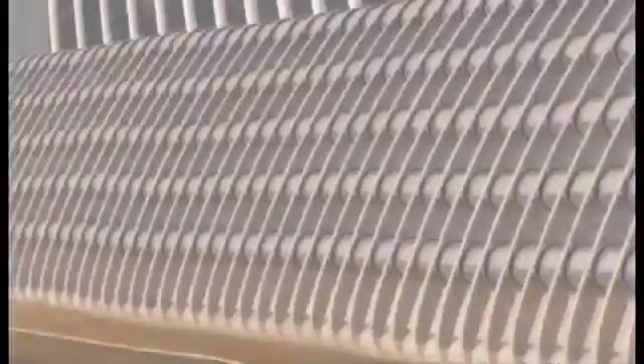This is the Millau Viaduct, the tallest bridge in the world. Its highest tower stretches a staggering 343 meters. So high, the bridge glides above the clouds. But this is a megastructure they said couldn't be built. When I've shown first the drawing of this bridge, they really thought I was crazy.

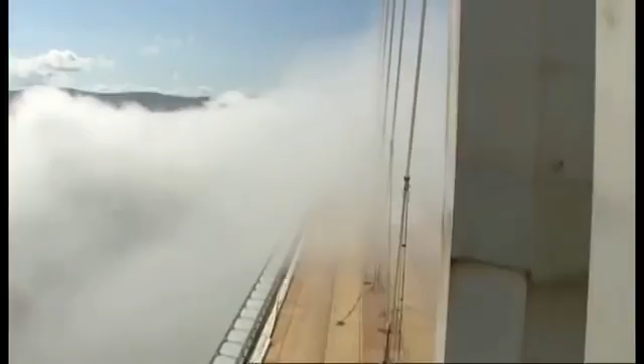The team attempting to build this amazing freeway in the sky had to survive landslides, fight winds gusting at 130 kilometers an hour, and weather massive storms as the bridge simply hung in the balance. It's a bridge that pushes the boundaries of engineering to the limits, and then beyond.

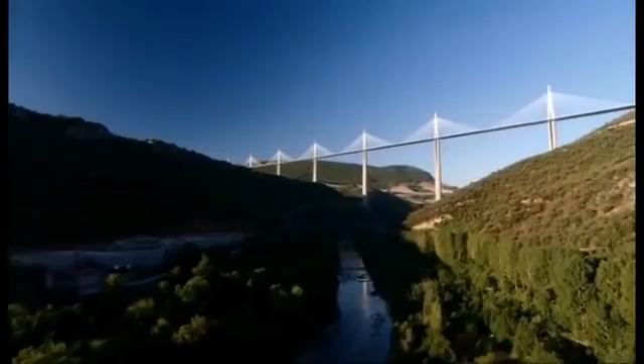Imagine building a series of Eiffel Towers, then slinging a 4-lane highway between them, all the way across one of the deepest valleys in France. Impossible though it sounds, that pretty much describes the building of the Millau Viaduct.

From the start, the construction team faced 3 daunting challenges. 1. Build the tallest bridge piers in the world. 2. Put a 36,000-ton freeway on top of them. And 3. Erect 7 steel pylons, each weighing 700 tons.

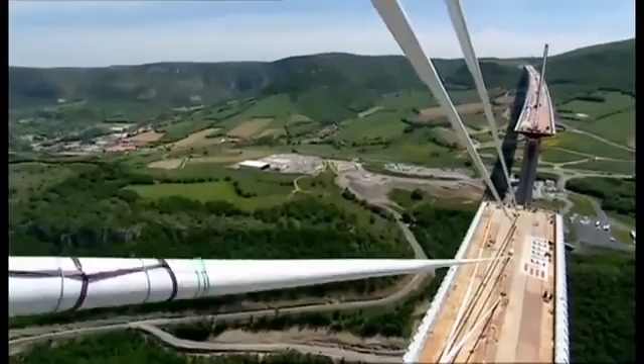And what's more, they had to do this hundreds of meters above solid ground. So high that if you were on top of the Eiffel Tower, you'd still be looking up at this awesome bridge.

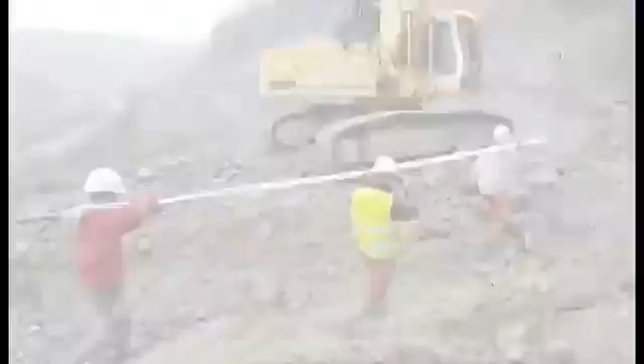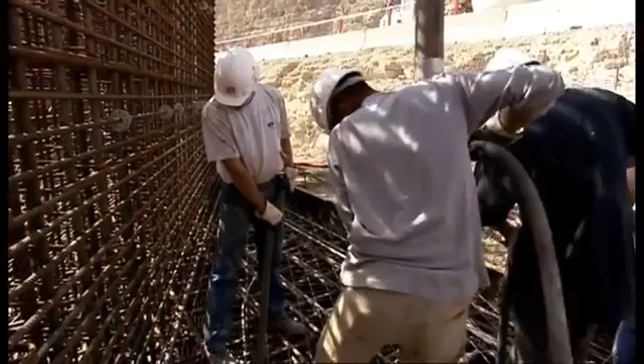October 2001, the team break ground. They're required to build a bridge that'll last for 120 years. And to win the contract, the teams promised to build it in record time, less than 4 years. By comparison, the world's longest suspension bridge, the Akashi Kaikyo in Japan, took a full 10 years to build. To up the ante, any delay will cost them $30,000 a day in penalties.

There are 7 piers that are numbered from the northern end of the valley. Number 1 will pose problems because of the steep slope. Number 2 will be the biggest challenge since it's the tallest. Crossing the river, number 3 is not much shorter. Then 4, 5, 6, and 7 climb the gentler slope to the south.

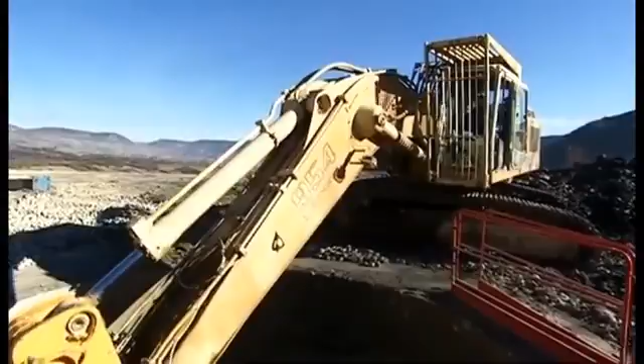To begin, the team had to bury the foundations deep in the bedrock in order to support the enormous weight the bridge will place on them. But the forces of nature were stacked against them. Geologists have warned of the risks posed by the region's fractured limestone. The rock is full of cavities that are essential to the local cheese economy.

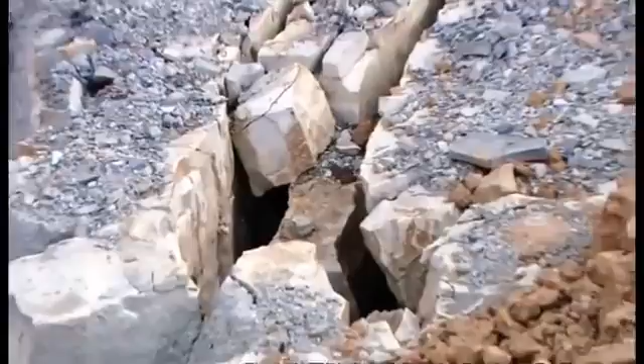These cave systems, close to Millau, are home to a unique bacteria responsible for the blue mold in the world-famous Roquefort cheese. But what's perfect for cheese could be disastrous for a megastructure. The geologist's diagnosis spelt one thing: landslides. This kind of catastrophe could jeopardize the entire project. Despite the warnings, building went ahead as planned.

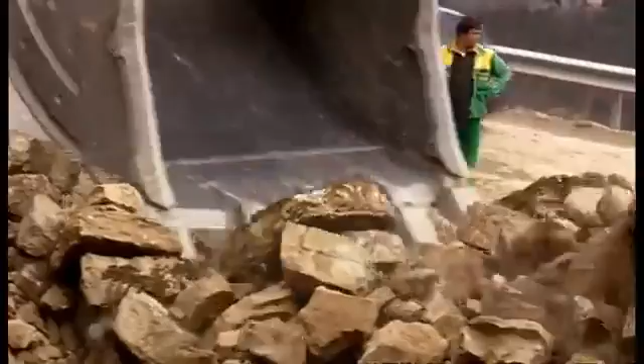Then, well into construction, as predicted, a dramatic storm causes a landslide. 4,000 cubic meters of rock collapse around Pier 1. Fortunately, the fallen rock doesn't damage the pier, but the warning is clear. They're forced to divert precious manpower and equipment to stabilize the slope and prevent a repeat collapse.

So if the area is prone to landslides, why did they build the world's tallest bridge here in the first place? The answer is simple. In the 1980s, France built a freeway linking Paris directly with Spain. This major artery headed south across the French countryside, while from the Mediterranean, the freeway headed north, until they both hit one of the deepest valleys in France and stopped dead.

Welcome to Millau, France's least favorite bottleneck. The town of Millau is in the mountainous region of the Massif Central, one of the most tranquil parts of France. But in summer, this poor medieval town suffered traffic hell. The locals couldn't take it anymore. Neither could their mayor.

It was terrible for our reputation. When you hear every day on the television and radio, avoid Millau, there's a traffic backup, a 5-hour wait in Millau.

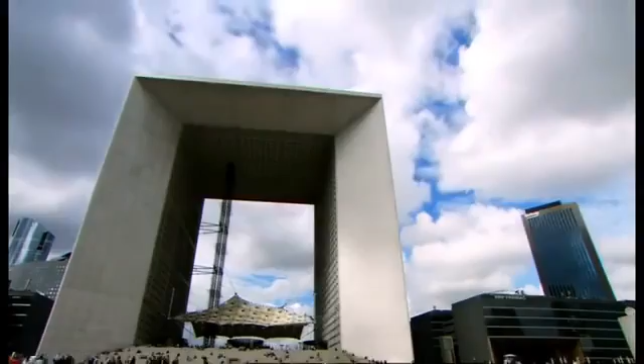It's clear exactly why the bridge was needed, but it took the French government a very long time to get round to building it. 12 years before construction began, up in Paris, the Ministry of Transport first came up with a plan. Their head bridge builder, Michel Virlogeux, is no ordinary engineer. He's a man who thinks big, very big, like the Normandy Bridge in northern France, the longest cable-stayed span in the world.

With this record-breaking structure completed, Virlogeux was on to his next, Millau. His plan, another cable-stay bridge, but pushing the technology beyond anything previously attempted, with piers 4 times higher than the Normandy Bridge.

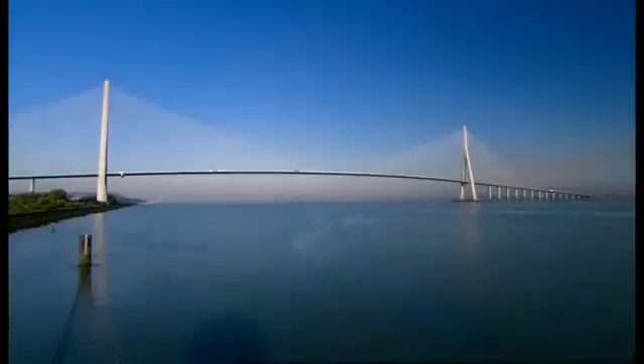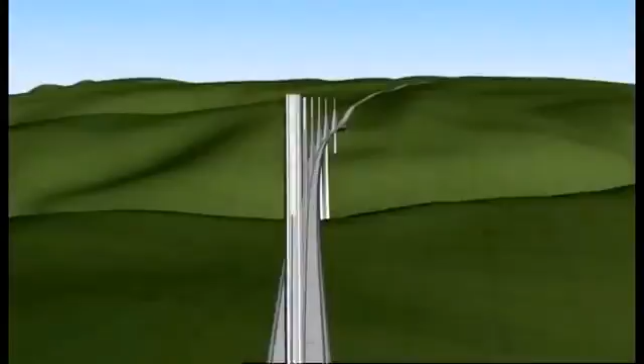The Millau Bridge would not only be the world's tallest, it would be unlike any bridge ever constructed. When I first showed the drawing of this bridge to the competent authorities, they really thought I was crazy. Virlogeux's Normandy Bridge has 2 sets of cables supporting the deck. But he wanted to up the stakes for Millau by losing 1 row of cables, so the remaining line would be forced to do twice the work.

More dramatically, the 2.5-kilometer Millau Bridge, instead of having a single main span, needed a whole series of piers to support it across the valley. No bridge builders had ever attempted a multiple-span, single-line cable-stay bridge on this scale before. The French authorities had a problem. Nervous about Virlogeux's groundbreaking scheme, they held a competition inviting other engineers and architects to compete with different designs.

The winner, Lord Norman Foster, is one of the world's superstar architects. In Hong Kong, he built the world's largest airport terminal. In Barcelona, offices literally hang from a mast on his communications tower. This is a man who regularly contemplates the impossible and delivers. You know, it's the challenges, and it's one challenge on top of another, on top of another. And with Millau, one of the biggest challenges was making it fit into the landscape, given it's just down the road from the famous Gorge du Tarn, France's equivalent of the Grand Canyon.

How do you make something which has to be so immensely strong against the forces of nature look very gentle, very delicate? How do you weave something on that scale into the most unbelievable landscape? Ironically, Foster's answer was to take Virlogeux's pioneering scheme, then push it one stage further. He turned an elegant piece of engineering into a delicate work of art by boldly cutting out 2 of the 9 original piers and seriously slimming down the remaining piers and road deck.

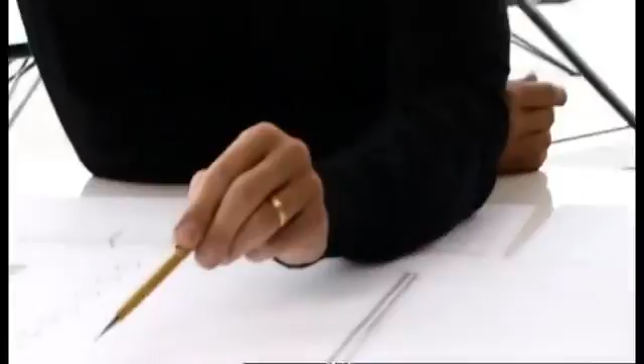Foster wanted the bridge to appear as delicate as a butterfly, but this butterfly has to support the weight of 5 Eiffel Towers in gale-force winds hundreds of meters above the River Tarn. Getting the design wrong would be a disaster. Then, with Millau still on the drawing board, Foster's record as a bridge builder suffered a major setback.

His Millennium Bridge in London is actually another record-breaking structure, the lowest profile suspension bridge in the world. But when this footbridge opened to the public in June 2000, it was a public relations disaster. Crowds walking over it set up a resonant frequency, and the bridge began to sway. As people adjusted their step to the small initial wobble, the effect was magnified.

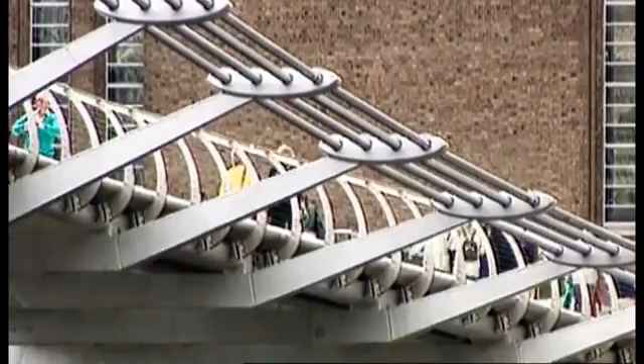Though it didn't threaten the structure, the swinging motion became so dramatic, the authorities closed the bridge for a refit that took 1.5 years and ended up costing over $8 million. It was a bad omen for the Millau Bridge, where construction was soon to begin. And at 15 times the height, a design flaw would be a catastrophe.

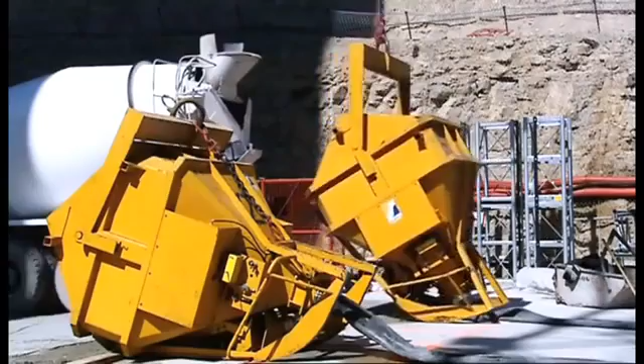December 2001, France's Millau Viaduct, the tallest bridge in the world, is under construction. Everything about this project is supersized. It'll need 200,000 tons of concrete, so much that the team have to build a concrete factory on site. But there's nothing straightforward about this concrete. The formula must be just right. It needs structural strength to support the massive loads it'll have to bear. But it can't set too quickly, as it has to be hoisted into position and poured hundreds of meters in the air. And it needs to be just the right color to suit Norman Foster's vision.

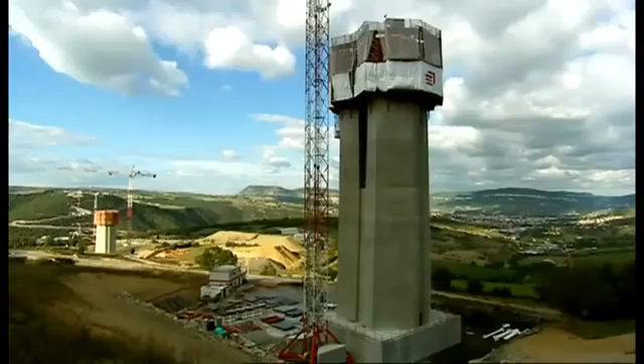In fact, the architect's vision has created a headache for the construction team. He's designed each pier as a complicated geometric shape, tapering the entire way up with vertical grooves set into them to create shadows. But what's just a line on paper for the architect was a major challenge to build.

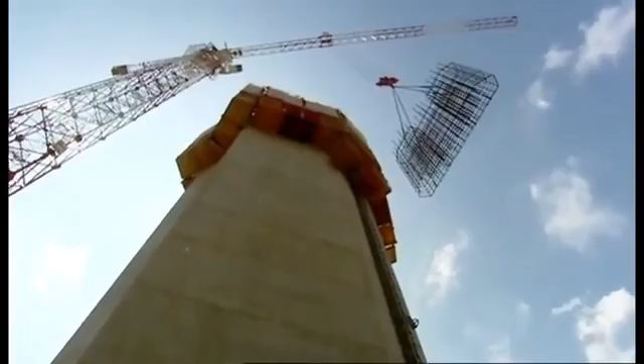The enormous piers are built step by step by pouring concrete into a temporary mold. To give the required strength, the molds are filled with a frame of steel reinforcing bars. In total, 16,000 tons of these steel bars are hoisted into place and secured. Laid end to end, they'd stretch the 4,000 kilometers from Millau all the way to Central Africa.

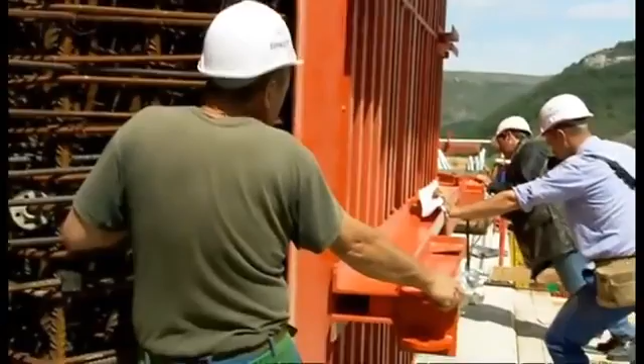The shape of each pier is seriously complicated. As a result, each time they remove the sections of red steel shuttering, they have to change the shape of the mold to fit the profile of the next 4-meter section. Manhandling these steel panels, weighing up to 15 tons apiece, is no picnic. And with the combined height of the 7 piers totaling well over 1 kilometer, they have to change the shape of the mold over 250 times.

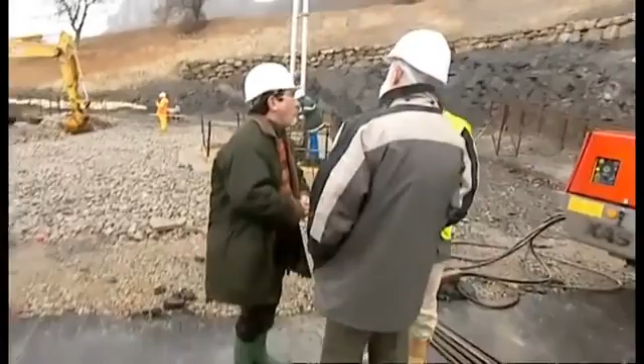Every 3 days, each team on each pier went through this whole cycle. Then they repeated the process. But it was a race against time, with a permanent threat of delay. Keeping the entire build on time and to budget was the daunting responsibility of one man, Jean-Pierre Martin.

If instead of 3 days we took 4, imagine that multiplied by the number of castings. We'd end up with a 3 or 6 month delay. With a penalty of nearly $1 million a month, this isn't something Martin wanted to contemplate. And this schedule wasn't his only headache.

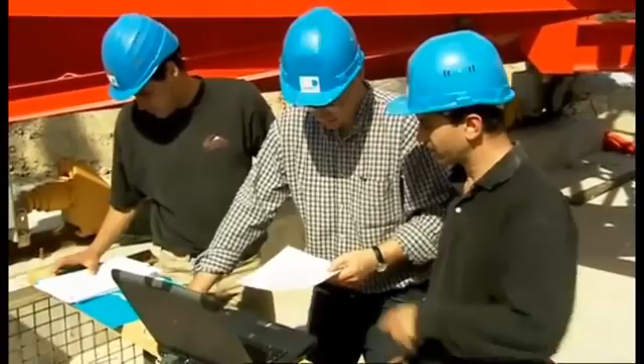You have to be pinpoint accurate when you're building the tallest bridge piers in the world. Get it wrong, and the bridge simply won't fit together. Just 10 centimeters out, about a hand's width on each 4-meter section, and the tallest pier could be 6 meters off at the top, the width of a jumbo jet fuselage.

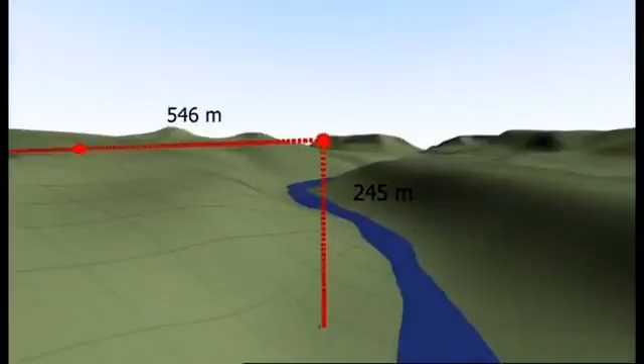Each team was aiming for a specific point in the sky. For Pier 2, this was exactly 245 meters above the ground, 546 meters from the north side, and 1,914 meters from the southern end. There was no room for error. The only chance they had to get it right was with GPS, accurate to within 4 millimeters. Using signals from multiple satellites, the team could pinpoint their position and make sure they're on target for that critical point in the sky they needed to hit.

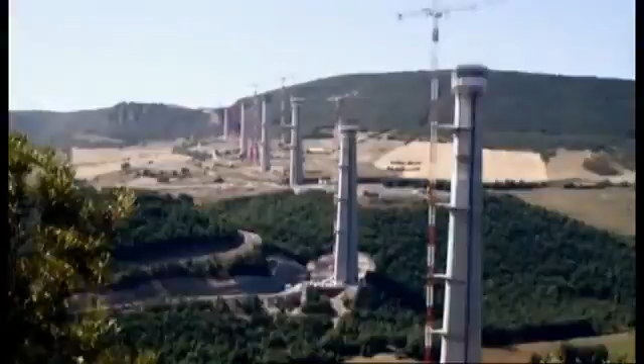Month after month, the piers climbed higher. Finally, by November 2003, they reached their full height. At 245 meters, Pier 2 becomes the highest bridge pier in the world. But is this record-breaking pillar where it's supposed to be? Amazingly, it's dead on target, to within 2 centimeters. Champagne corks pop. It's time for a major celebration.

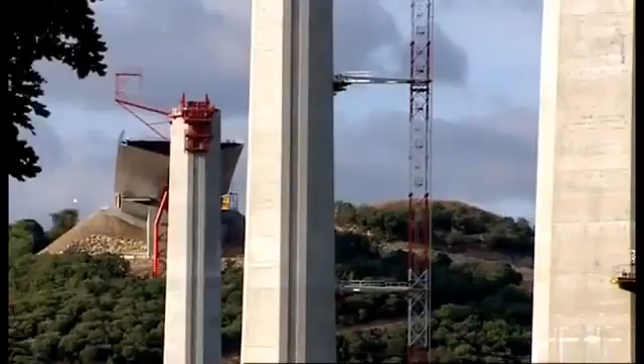Against all the odds, they were 1 month ahead of schedule, but the team couldn't afford to relax. The next stage of the project would be the most difficult part of the build. Phase 2 of building the world's tallest bridge involved putting a 2.5-kilometer roadway weighing 36,000 tons on top of the piers, a full 270 meters above the River Tarn.

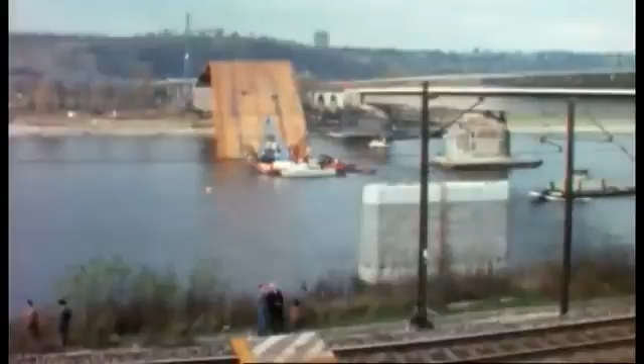Bridge builders know danger comes with the territory, but working at these heights can be lethal. More than 34 died constructing New York's Brooklyn Bridge. 35 died in 1970 on the Westgate Bridge in Melbourne, Australia. And 1 year later, 13 workers were killed when the Koblenz Bridge in Germany collapsed into the Rhine.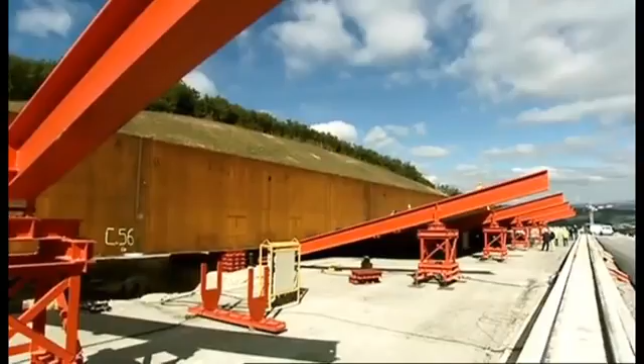With these fatalities in mind, the team decided to fabricate the entire road deck on the safety of solid ground. This meant building it in steel, which in theory would be much safer than lifting vast concrete sections hundreds of meters into position. There's only one problem with this plan. No one had ever put a road deck on piers anything like this height before, let alone over a 2.5-kilometer span.

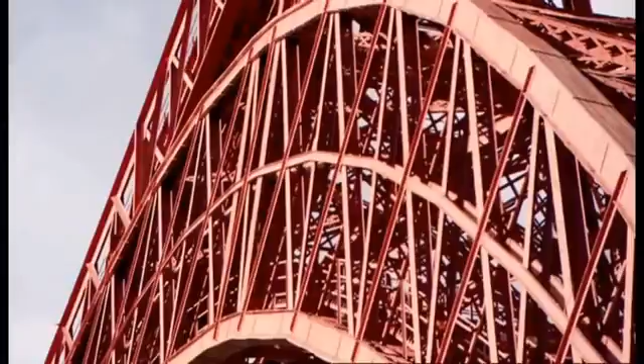In the end, only one steel manufacturer had the courage to take on this colossal challenge. Eiffel, the steel firm set up by the great French engineer. Eiffel built what was once the tallest bridge in the world, the Garabit Viaduct in southern France, before getting round to the framing for New York's Statue of Liberty and, of course, his signature tower in Paris.

But despite the company's experience, Eiffel's director, Marc Buonomo, knew he was taking a serious risk. It was a gamble for the company, because if there had been a mistake, if it hadn't worked, it would have been the whole company.

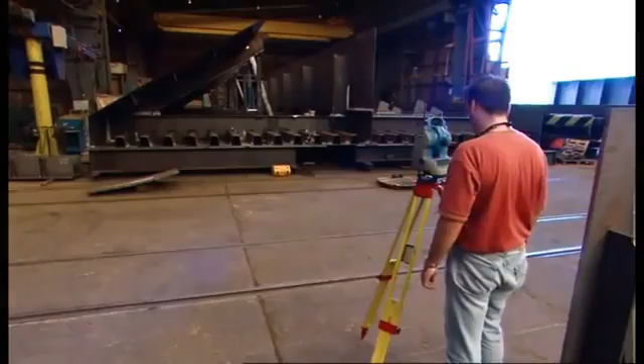They fabricated the massive sections that would make up the road deck in the company's steel factories. This immense jigsaw puzzle involved manufacturing 2,200 separate sections, weighing up to 90 tons, and some of them 22 meters long. Their accuracy is measured with a laser to within a fraction of a millimeter. The huge square tubes are the central spine that should make the deck rigid. The triangular side panels will be welded on either side to create the width for a 4-lane highway.

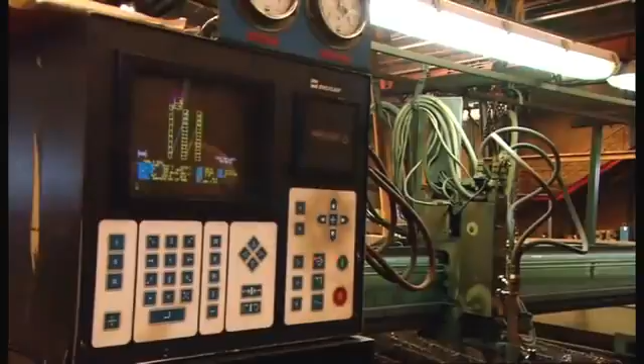To meet the punishing schedule, Buonomo automated the manufacturing with a 2-headed welding robot and a plasma cutting machine. Each cutting pattern or template is programmed into the computer. Then the machine automatically blazes its way through the steel. The torch reaches a scorching 28,000 degrees centigrade. That's 5 times the temperature of the Earth's inner core.

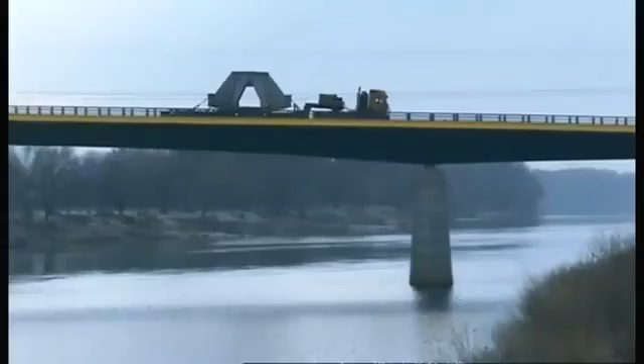But cutting and welding was the easy part. The hard part was getting these monster sections the hundreds of kilometers from the factories to Millau. The routes had to be planned with precision to avoid major damage. The police coordinated safety and clearances. Even with that level of preparation, some obstacles felt as if they're cutting it just too close for comfort. And this was no one-off event. To build the viaduct took over 2,000 of these extraordinary road convoys.

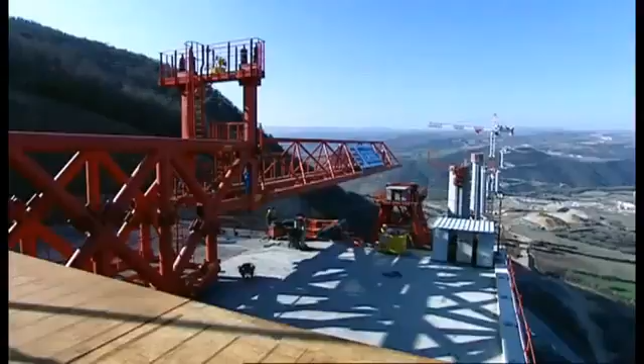The components arrived at assembly plants set up, one on either side of the valley. Here, the pieces of a massive jigsaw puzzle were welded together to form the 2 halves of the deck. But getting these 2 halves to span the valley on top of the world's tallest bridge piers would be a major challenge. They'd be the first team to put a road deck on a pier taller than an 80-story skyscraper.

And pushing bridge building beyond anything attempted before, they planned to slide the entire 2.5-kilometer road deck over in 2 colossal pieces. The bridge's chief engineer, Jean-Marie Cremer, was one of the few people who believed it could be done. All the engineers who know this method, who were in the know, didn't believe it was possible. If the team had got their calculations wrong, the entire structure could collapse into the valley.

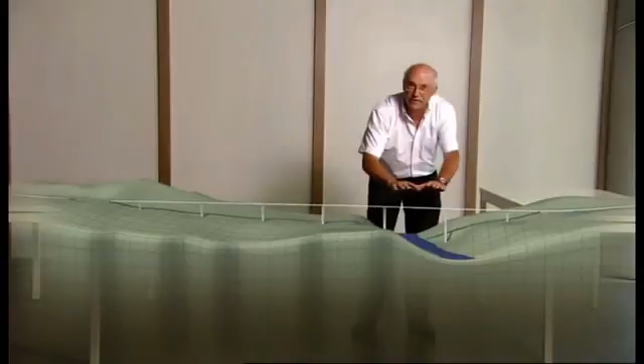We found a solution for the construction, which was to launch the bridge from the 2 sides. One part on the Larzac Plateau, one on the Rouge Plateau. And to push them from the 2 sides and to make them come and meet here above the River Tarn. Smaller bridges use a similar technique. A powerful set of hydraulic rams literally pumps the deck from one side to the other. But Millau would be the longest launch ever attempted over the highest piers in the world, and the results could spell disaster.

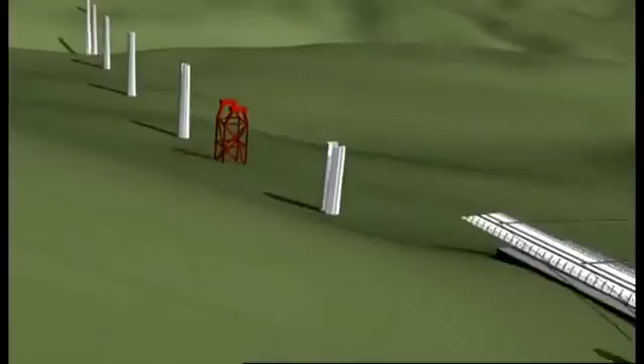The deck is so slender, it would bend and collapse if it were pushed out over the 342-meter spans between each pier. The furthest anyone's previously managed is less than half that distance. The first part of the solution was simple. Fit a pylon so its cables support the front of the deck as it goes out over the valley. Then construct temporary steel support towers that halve the spans to a more manageable 171 meters.

These steel towers were a construction feat in themselves. The largest, over 170 meters high, is the tallest ever built, and they needed to carry a massive load. 7,000 tons as the leading edge of the deck, together with the first 90-meter pylon, slide over. And simply pushing this enormous weight over the top of the vulnerable piers would bring them crashing to the ground. This was the nightmare scenario. If we'd done a conventional launch, we would have knocked the piers over like the pins in a bowling alley.

Someone needed to reinvent the way this type of bridge is built. And it's Marc Buonomo with Jean-Marie Cremer who came up with the breakthrough. The basic principle can be demonstrated with a heavy box and a wobbly table. With a normal launch, you knock over the piers. I want to advance the deck over the pier, but if I push the deck from here, I'd knock over the piers, because they're so tall.

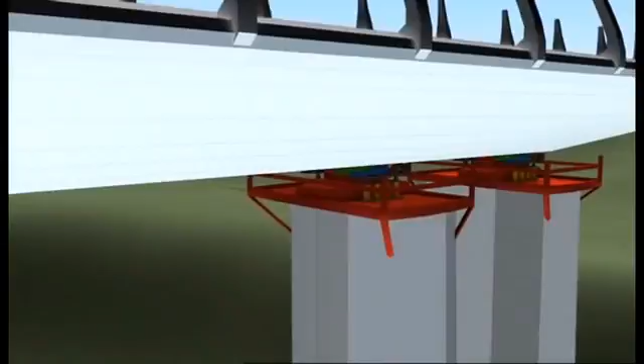The idea is to install a launching system on top of the pier, and that way, if I push the deck, it has no effect on the stability of the piers, and the piers won't fall over. The trick is to use a series of these launching systems to jack up the deck and inch it forward. Each system uses two wedge-shaped blocks under each side of the deck. The upper wedge is pulled forward by a hydraulic ram.

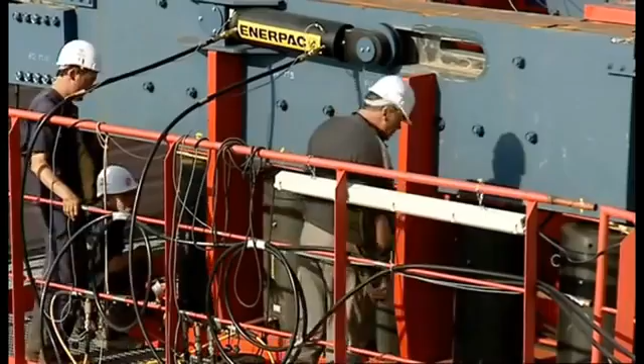It slides up the slope of the lower wedge at the same time, lifting the deck from its supports and advancing it 600 millimeters. The lower wedge then retracts, dropping the deck onto its supports. The upper wedge returns to its original position, and the whole cycle begins again. 4 of these clever devices are placed on each pier, all programmed to work at exactly the same time. The result is that together, they pick up the entire roadway and shunt it forward.

But if one fails or gets out of step, it could spell disaster. The force could push the bridge piers apart till they collapse. When you're up there and you see Millau 300 meters below you, you ask yourself, was this a good idea? The future of the entire project was now hanging on a prototype, and it had never been tested.

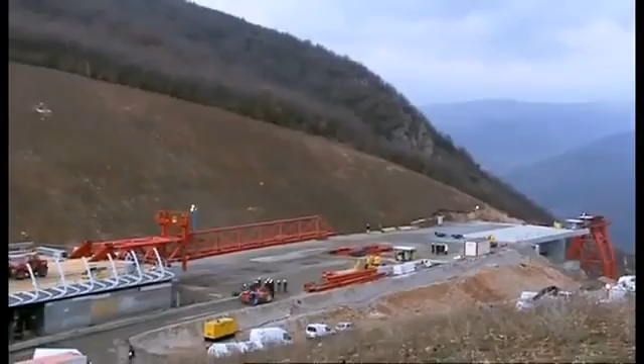It's the morning of February 26, 2003. Do or die day for the world's tallest bridge. Everything is about to be put to the test. The flexibility of the deck, the strength of the temporary piers, and critically, the pioneering hydraulic ram system. Even Buonomo, the man in charge of the launch, had his doubts. As it had never been done before, I have to tell you, I had fears that it wouldn't work.

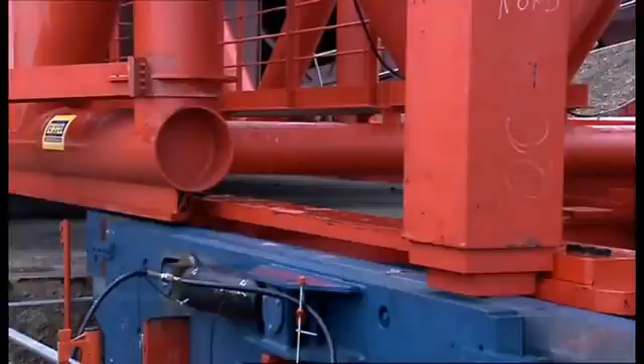The pumps kick in, the pistons start to push, and the deck begins its huge journey across the valley. The moment I heard the motors start, I put my finger on the deck, and I could feel my finger move. Every 4 minutes, the deck advanced 600 millimeters across the valley. Surveyors tracked its progress. But it was still a nail-biting time as they watched the unsupported deck crossing the void.

Eventually, the deck reached the safety of the first pier. 204 meters down, only 2,256 to go. The launching system seemed to be working as planned. The engineers were feeling optimistic. But as the deck advances into space, it'll become more vulnerable to the wind, which can reach 130 kilometers an hour.

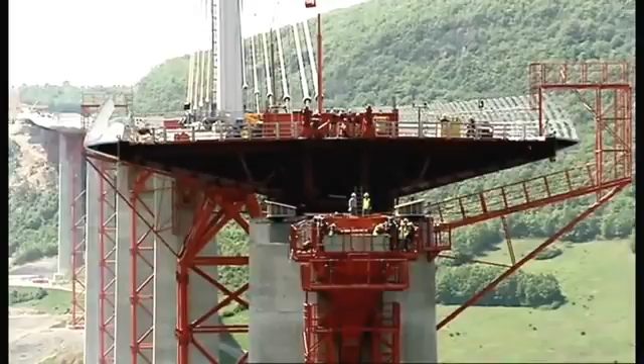Unfortunately, the road deck has the shape of an upside-down airplane wing, and the team's greatest fear is that this wing could simply take off. The engineers kept a close eye on the wind and weather conditions. When they were satisfied there was a 3-day weather window and the wind wouldn't exceed 85 kilometers an hour, they'd give the construction team the go-ahead, and the deck launch could continue.

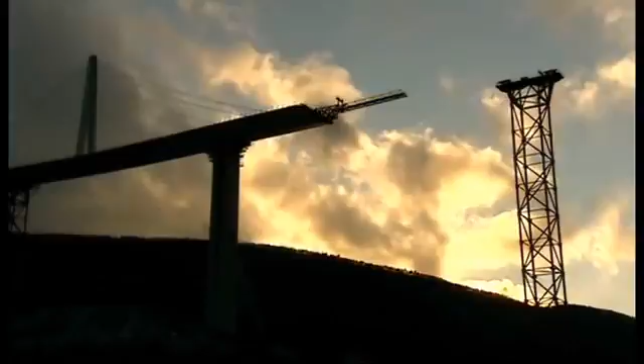The reason for this precaution is simple. Strong winds can literally tear a bridge apart. In 1940, Washington State built a suspension bridge across the Tacoma Narrows in the US Northwest. It opened with a grand ceremony on July the 1st. But the celebrations were short-lived. The bridge had a major problem: the wind.

Girders beneath the deck, designed to make the bridge rigid, actually blocked the wind, causing the roadway to ripple alarmingly. Locals soon dubbed it Galloping Gertie. On the 7th of November, with the wind less than 70 kilometers an hour, the bridge begins to twist violently. At 11 a.m., time runs out for Galloping Gertie. The wind sends the bridge crashing into the river.

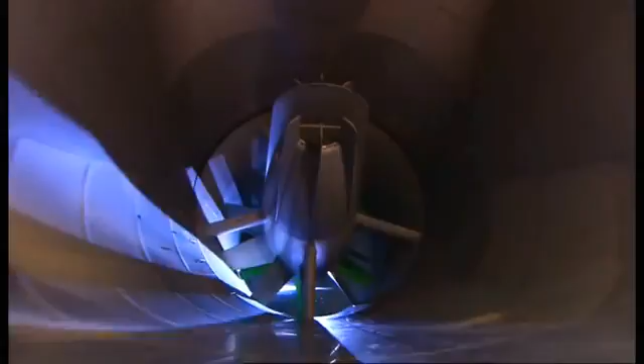Wind tunnel testing is now standard procedure as a direct result of Galloping Gertie. For the Millau Bridge, they analyzed the wind in the Tarn Valley over 18 months, then recreated those conditions in the wind tunnel. Wind engineer Olivier Flamand was shocked by the results. The average wind speed was relatively low, but because there's such strong turbulence, it created very fast peak winds. The rugged terrain creates serious turbulence at the height of the road deck. Winds peak at 130 kilometers per hour. That's hurricane force.

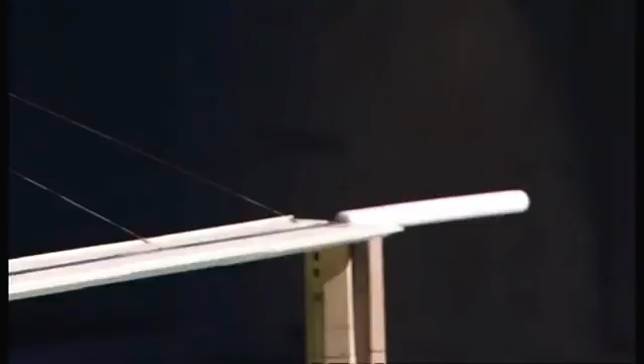They tested every aspect of the bridge to analyze the risks: piers, pylons, and critically the deck. But it's not just the aerodynamics of the finished bridge. They needed to find out how it would behave when it was most at risk, during the launching of the deck. Olivier and his team reached a chilling conclusion. The winds they've measured are strong enough to blow the unsecured deck off its supports and send it crashing hundreds of feet to the valley floor.

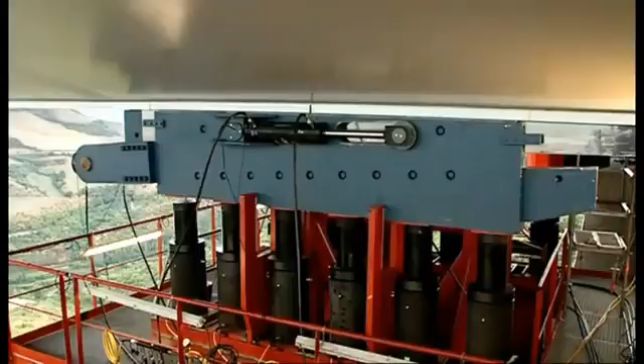And then the nightmare began. On the 22nd of August 2003, 6 months into the deck launch, one of the launch systems failed, leaving the deck hanging in the wind. To make matters worse, the weathermen were predicting storms. So far, these massive pumping machines had worked perfectly. But the fact is they were prototypes, and due to the frantic schedule, they'd never been tested.

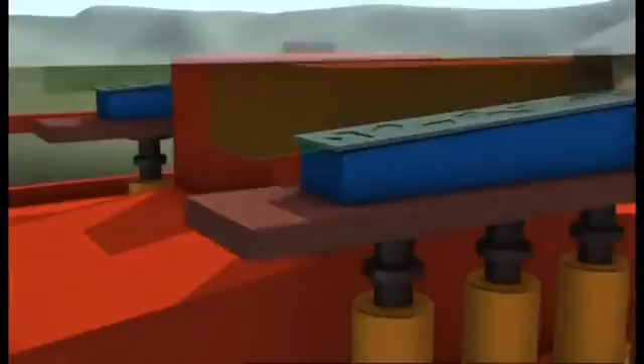The problem was that the non-stick Teflon between the sliding surfaces had ripped, and the friction generated was too much for the hydraulic rams to push against. Unfortunately, no one had planned on replacing parts of this monster machine mid-launch on the top of a massive concrete pillar. This was very bad news for the man who staked his reputation on this system. It was maximum stress, like poison in your mouth. You don't forget that.

Re-examining their calculations, they realized the cause of the problem. They'd underestimated the forces between sliding surfaces, but they wouldn't be able to repair it without the necessary spare parts. The clock was ticking, and Marc Buonomo needed a solution fast. When Apollo 13 came back with that incident, the NASA engineers requested they did the inventory of everything there was on board to know how to fix it.

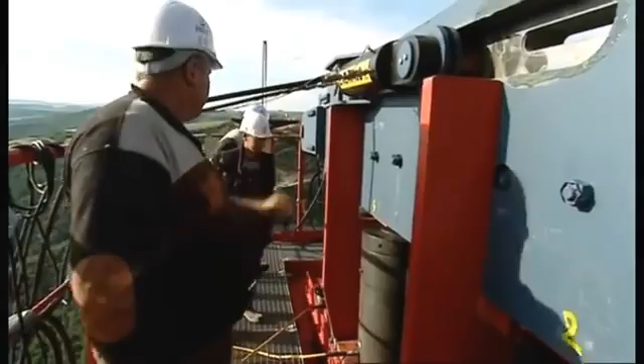The Millau team did an inventory. They realized that the other launching machines, not yet being used, could be stripped to provide the new Teflon surfaces they needed. Working all through the night, the team extended the access platform. This allowed them to take out the 5-meter-long, 2-ton steel wedges, replace the Teflon, and reassemble the launching machine. By 8 a.m. the next morning, it was ready to resume the launch.

The rest of the week, the predicted storms arrived, and another set of launching machines wore out. So when the deck finally made it to the safety of the next pier, the team breathed a major sigh of relief. You don't forget that. I won't forget that for 4 hours I was really scared. The two decks continued their journey across the valley, day after day, week after week for a full 14 months. They approached each other, millimeter by millimeter.

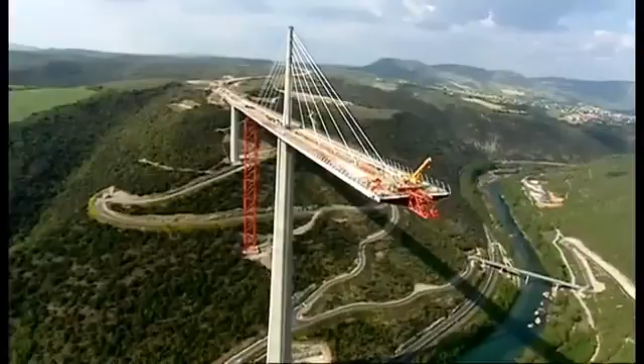By May 2004, they'd reached a critical phase. From the northern end, the shorter deck had traveled 717 meters into space to reach its final resting place. From the south, the longer deck extended over 1.5 kilometers. Only the section over the river, the one point where it was impossible to erect a temporary pier, divided them.

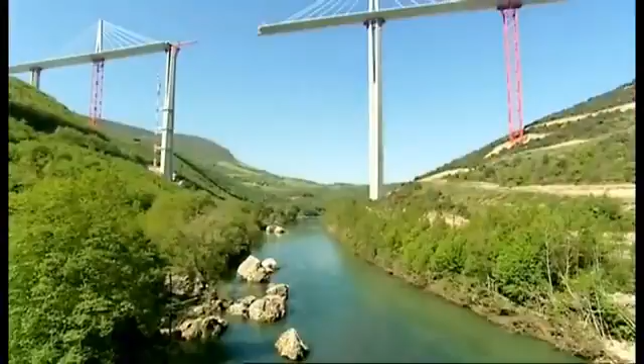But would they meet as planned? If they've got their calculations wrong, they'll have built the biggest white elephant in Europe. Even the man behind the whole project had his doubts. I was not convinced at all that the two parts of the deck could meet exactly with a perfect geometry.

The odds were against them. Calculating such a feat so precisely is a Herculean task. Firstly, the two starting points on the northern and southern slopes of the valley are at different heights. Secondly, the bridge has a subtle curve to it. As a result, each steel panel which makes up the road deck had to be cut and welded with extreme precision. It would be an engineering triumph if they got these two sloping curved decks to meet as required.

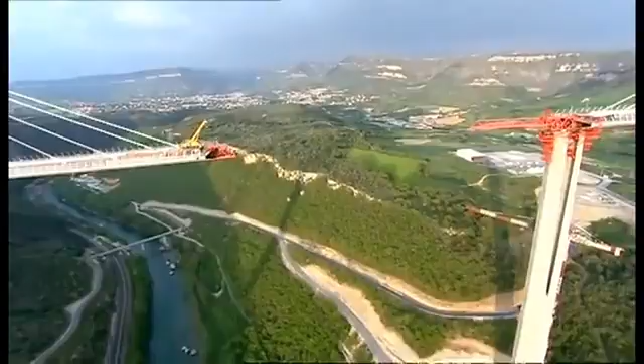The team checked the weather reports. With the wind inside safety limits, they gave the go-ahead for the final push. The rams began to drive the deck's leading edge off the safety of Pier 3 towards its destination. At this point, a total of 21 launching systems needed to move at exactly the same moment to avoid disaster. If anything were to go wrong now, the man responsible would be Marc Buonomo.

Everyone asked me, how can you be sure that it will go straight? So to be sure that they were going to the right place, I had a GPS put on the front, so I could see the gap between the theoretical and the real position. Over the next 2 days and nights, the deck advances 600 millimeters at a time towards its final resting place. The world's media are watching the critical meeting of the decks. And to add to the pressure, the French Prime Minister is due to drop in to celebrate the event.

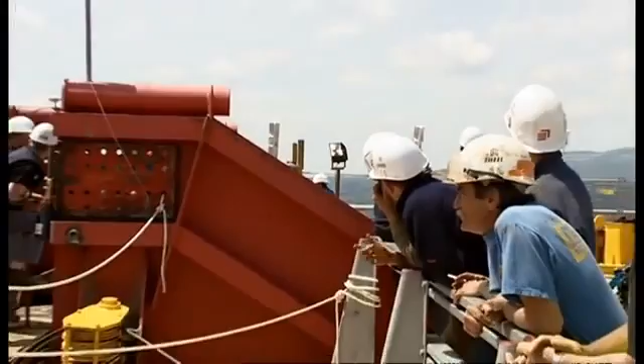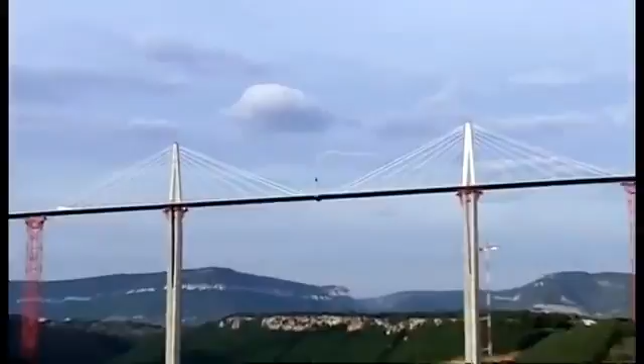The deck pushes forward, now with only centimeters separating the two sections. A magnum of champagne is hung between them to mark the moment. At last, union. The two massive steel decks have traveled high over this valley, a total of 2.5 kilometers, and when they check, they're aligned to within 1 centimeter. That's accurate to within 99.9999%. All the measuring, all the calculations have paid off. They've nailed it.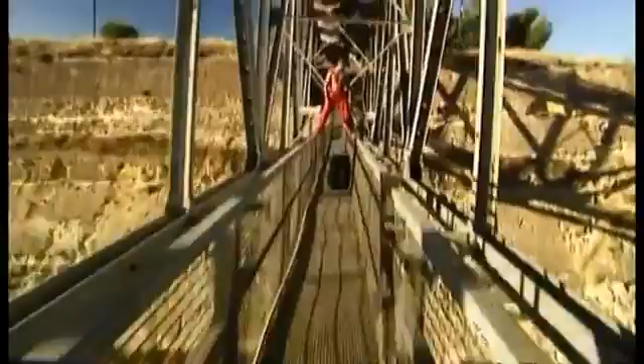The meeting of the decks was a special moment. News reports traveled round the world, and in Salzburg, Austria, they reached Felix Baumgartner, aka Felix the Conqueror. Felix has made a career base jumping from some of the tallest structures on the planet, and within 24 hours, he'd driven to Millau and was calculating the logistics for the jump, factoring in his two main aims, to avoid arrest and death.

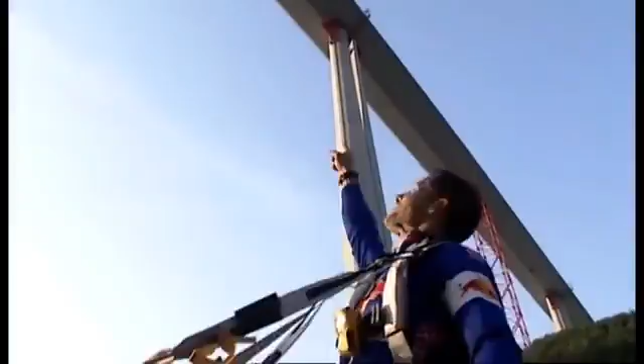Baumgartner waited for darkness before arriving on site. He found his way to the base of Pier 2, then climbed an access ladder the full 245 meters to the top. He entered the steel road deck and found a place to hide until daybreak. He had to remain concealed until the sun was high enough for his cameramen to record his world record attempt. At 7 a.m. the following morning, Felix the Conqueror emerged. He took a cool backward flip off the tallest bridge in the world and entered the record books. The tallest bridge in the world, 250 meters. I did it. And having evaded death, he made sure he's not caught by the police.

The decks have been joined, and the team have reached the final phase of the project. But there was still a race to meet the schedule, and their problems weren't over yet. Everyone could see the dramatic undulations in the flexible steel deck. Even some hardened bridge builders wondered about its structural integrity. It was a huge surprise for everyone. All the engineers said, we knew steel was flexible, but not that flexible.

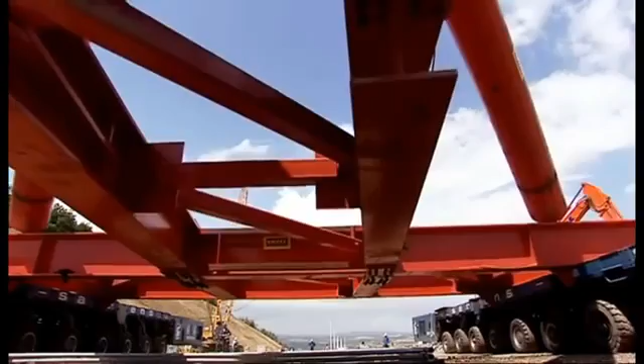The team were relying on the pylons and cables to pull the deck straight. Each massive pylon is 90 meters high and weighs 700 tons, the equivalent of 85 London buses. Placing them in position on the slender deck, high above the valley floor, would go beyond anything ever attempted. Once again, Marc Buonomo had a plan. You know, the first people to make vertical pylons were the Egyptians. Buonomo adapted a technique used in ancient Egypt to erect obelisks in the sands.

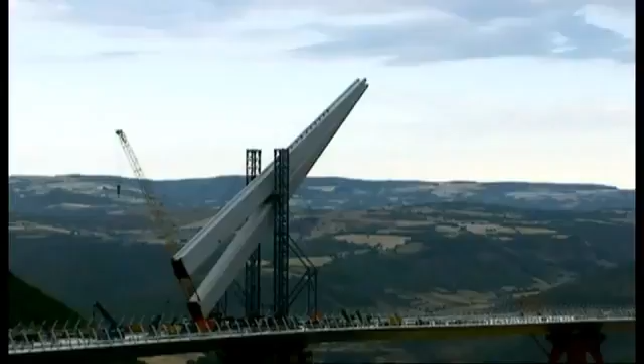On top of the road deck, the team put up two enormous steel towers, both of them secured by cables and equipped with a hydraulic system capable of raising 1,000 tons. The 700-ton pylon is then lifted by the hydraulics. As it rises, it pivots little by little until it's vertical. It's then lowered safely onto its anchorage point. Buonomo's 4,000-year-old technique worked to perfection.

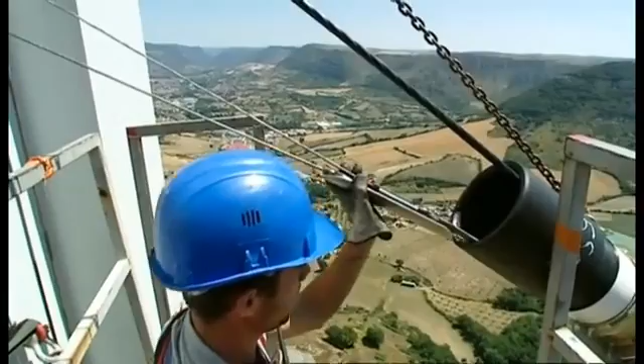With all 7 pylons in place, the team could attach the cable stays that would straighten the rippling deck and give it the strength to cope with full traffic loads. They hoped. The weight of the roadway is now over 40,000 tons, the equivalent of a cruise ship, and the 154 cable stays should prevent it from sagging or collapsing. The strongest stays are made up of 91 individual steel strands and have a breaking strength of 25,000 tons, strong enough to hold back 25 jumbo jets, all at full throttle.

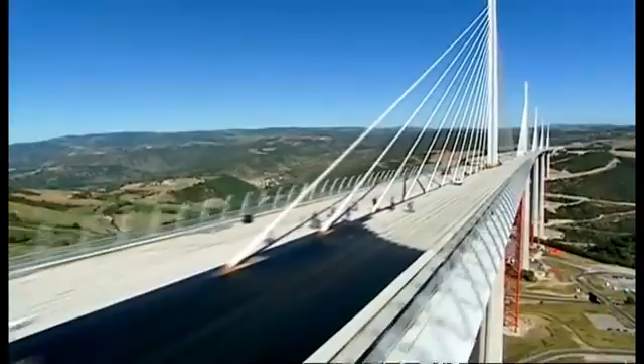As the cable stays are tensioned, true to plan, the ripples in the road deck are pulled straight. Over the 2.5-kilometer deck, the ripples are now no larger than the size of a thumb. They're finally on the home straight. The road surface goes on, adding a further 10,000 tons to the load. That's like driving 153 battle tanks onto the deck. But before it could open to the public, the team needed to know the bridge is safe. It would have to pass one crucial test.

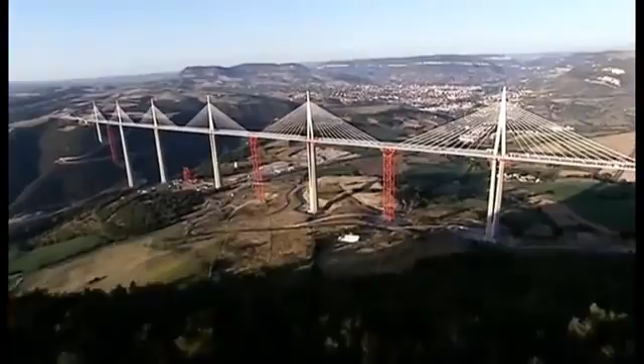After 3 years, the construction team building France's Millau Viaduct, the world's tallest bridge, are about to find out if they got their calculations right. On a single-span cable stay bridge like the Normandy Bridge, a large load on the main section is no problem because the cables are attached to solid ground and can't give.

On the Millau Viaduct, with its 8 spans, the cables are attached to the deck of the adjacent sections. A load on one section will cause it to drop, pulling the stays down. As the pylons lean in, the matching stays are pulled upwards, lifting the neighboring decks and causing a dangerous rippling effect.

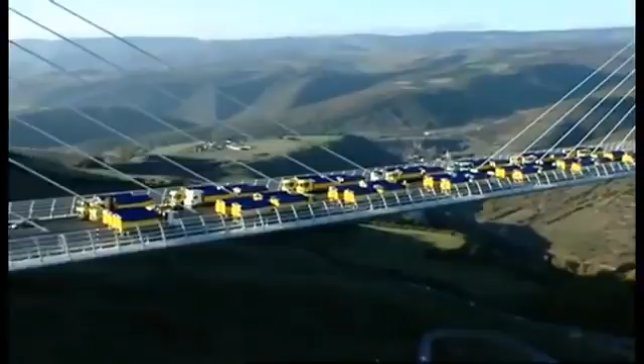It's right now the team put their bridge to the test. These 28 trucks have a combined weight of over 900 tons. They are now positioned in the critical point, mid-span. The engineers hold their breath. Measurements are taken. The span bends just 26 centimeters. This is a triumph for the engineers. The bridge was designed to cope with more than double that.

4 weeks later, on December the 14th, 2004, President Jacques Chirac officially opened the Millau Bridge. A proud moment for the whole of France. Just over 3 years of construction have produced the tallest bridge in the world, designed to last at least 120 years. And against the odds, the project manager even brought the job in on time. But that's not what he's most proud about. What I remember, because on construction sites there are often accidents, is that we had no serious accidents, nothing more than a minor injury.

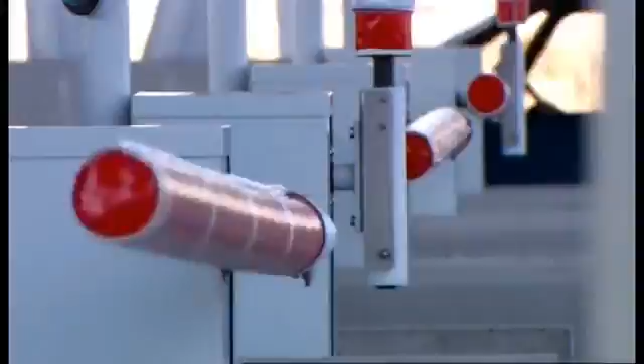As soon as it opened to the public, the bridge was an instant success. But the real test isn't till its first summer, and the French all take their annual vacation. No one ever expected anything like this. Numbers peaked at more than 50,000 vehicles a day. At over $7 per car, that's great news for the construction company, who are clawing back their $478 million investment in the project.

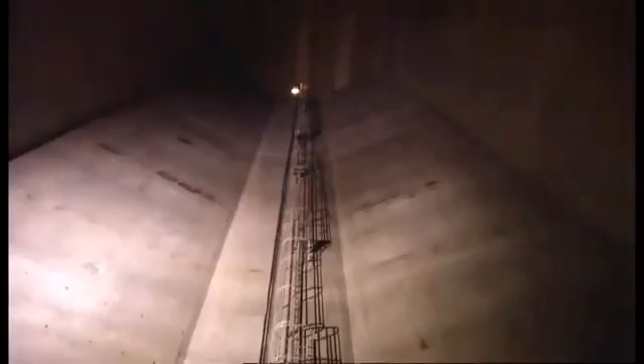This was an epic bridge to build, but it's just as epic to maintain. Thierry and Frank are assigned to P2, the world's tallest bridge pier. This structure is no solid concrete block. It's a series of vast hollow spaces. Their job today is to test the communication system and electric circuits on each of the 7 structural floors. This involves a 343-meter climb, going hand over hand up a ladder for the rest of the day. By dusk, when Thierry finally reaches the summit of the pylon, he may be exhausted, but there is a payoff. You get a fantastic view from here, a 360-degree panorama.

The tallest bridge in the world has become an icon. But this is creating problems no one had ever imagined. Locals have been taking over the bridge as a platform to get media attention for their causes. This crowd was hoping that driving sheep over this freeway in the sky would help them get more farming subsidies. Jose's job is to prevent this kind of incident from creating a danger, and on this bridge, the incidents keep on happening. An alarm triggered by a motion detection system means there's a stopped vehicle on the bridge. Immediately, Jose dispatches a colleague to deal with the situation. The last thing anyone wants is a multi-car pile-up on a 2.5-kilometer bridge, a quarter of a kilometer in the sky.

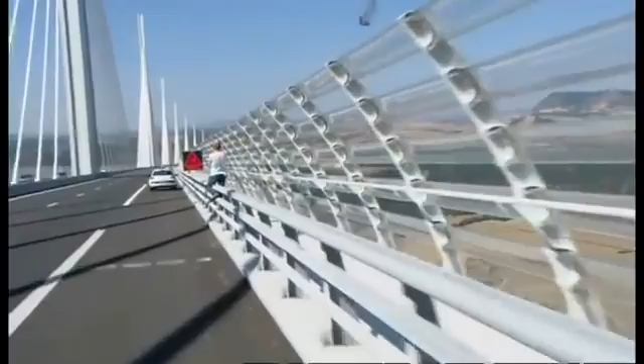Jose zooms in his camera to reveal the man has left his car and is sitting dangerously on the crash barrier. The driver's probably only broken down, but already one man who stopped climbed over the wind barrier and jumped to his death. Bruno intervenes. Thankfully, it's no more than an irresponsible photographer who's sent on his way.

You could say the Millau Bridge is a victim of its own success. It's definitely become a major tourist destination. 700,000 visitors in the first 9 months. Fortunately, most of them wait till they're off the bridge to take their photos. It's magnificent. I came 600 kilometers today to see the Millau Viaduct. There's only one thing to say. It's extraordinary. They're drawn because it's a world-beating structure, but also because it's incredibly beautiful, delicate, and minimal. Not what you'd expect from a structure that's nearly 1/3 taller than any other bridge on the planet.

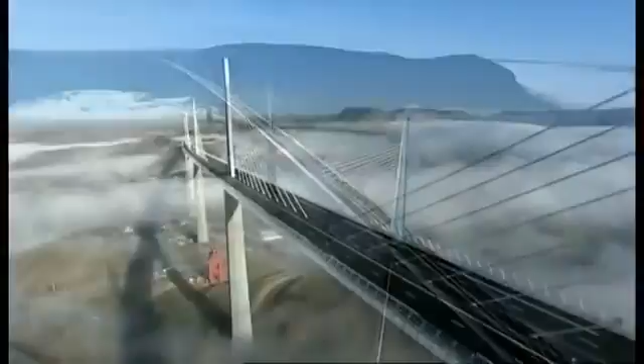And architect Lord Norman Foster's achieved his aim to give the driver the sensation of soaring. As you leave these plateaus, you do fly. You fly across this bridge. Literally, you are above the clouds. And the result certainly pleases the man who dreamt it all up. To see erected this bridge, which I imagined 15 years ago, it's something magic. This is the longest pure cable stay bridge in the world, the tallest roadway in the world, and of course at 343 meters, it is the tallest bridge ever constructed.